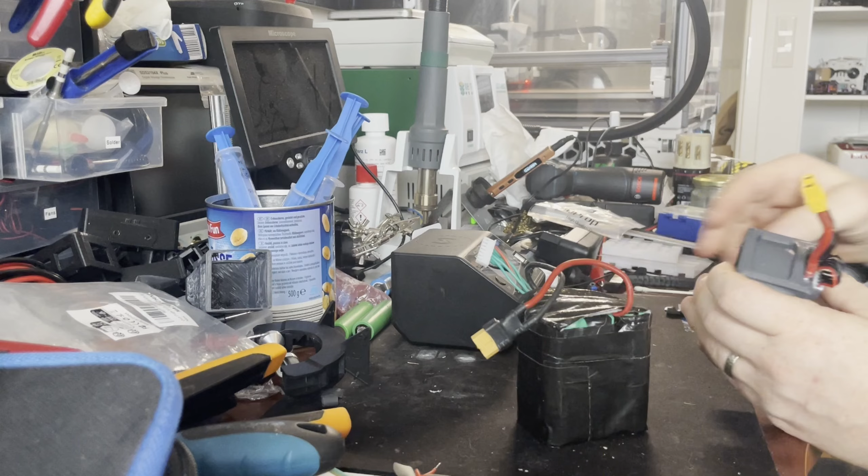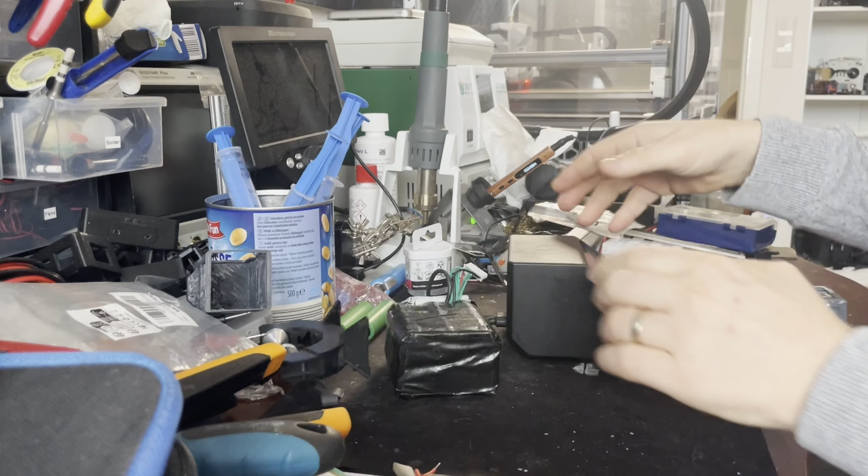Alright friends, I want to talk about power for charging your stuff on the field. Everyone has some LiPo chargers that you can use on the run, no problem. You can plug in your stuff here and get it connected. And what do you do? You have some big 2170 pack or something, you plug it into your charger. Ta-da. And then you can go and charge your batteries on the go.

But you have to take care of these batteries, and you have these balancer ports, and you have to charge them the same way like you have to charge your normal batteries. And that sucks, it's not great. So what do you do? You get a power bank. So you have a power bank here. It's a USB power bank, and you can go.

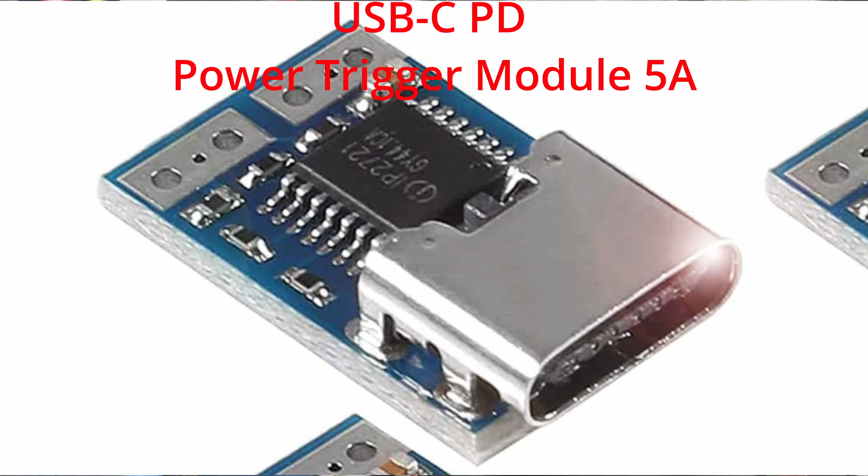What we can do actually is we can get a USB cable, USB-C, plug it into your power bank, and then take your power bank here. Then you get something like this. This is a little converter, and I can show you in detail in a minute. And you just plug it into your USB.

So okay, and then you go and plug in your stuff, and normally, maybe other way around. Direction doesn't matter with USB-C. Then you can go, and it's 20 volts, 0 amps right now because I'm not charging anything. Then you can plug in your battery, and then you can charge your battery with a power bank.

That's fine, but something like this will only work for, it's 70 watt hours or something. So it's 20,000 milliamps 1S. That's fine, but it's not really that great. So what can we do? Charge these things all the time, and that's really not great. I don't like it because I don't want to fiddle with all this balancer port stuff. And because of that,

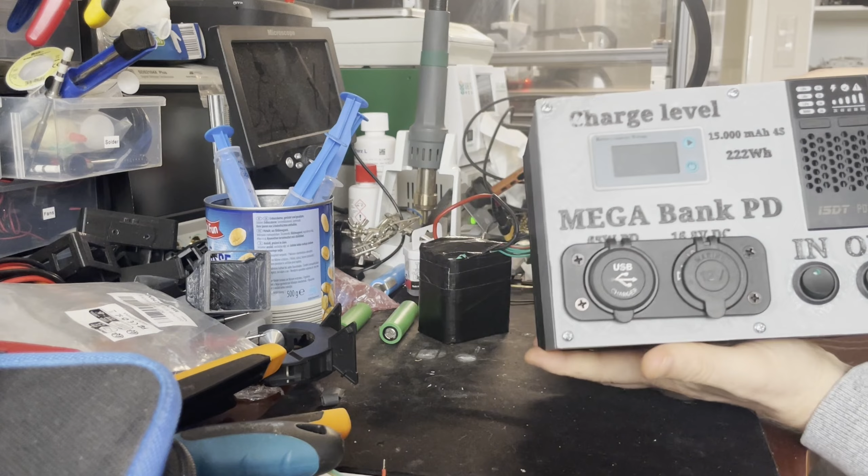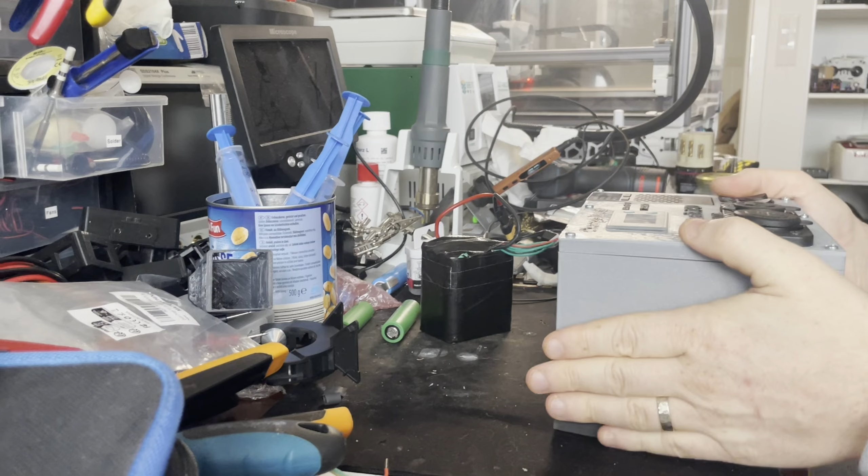I built a mega bank here. This is a box that I have printed in ABS, and it has multiple features. One feature is what I was complaining about a second ago, how to charge your power bank. A normal power bank just plugs into USB-C, and you have a USB-C charger anywhere, and then you can charge your normal power bank.

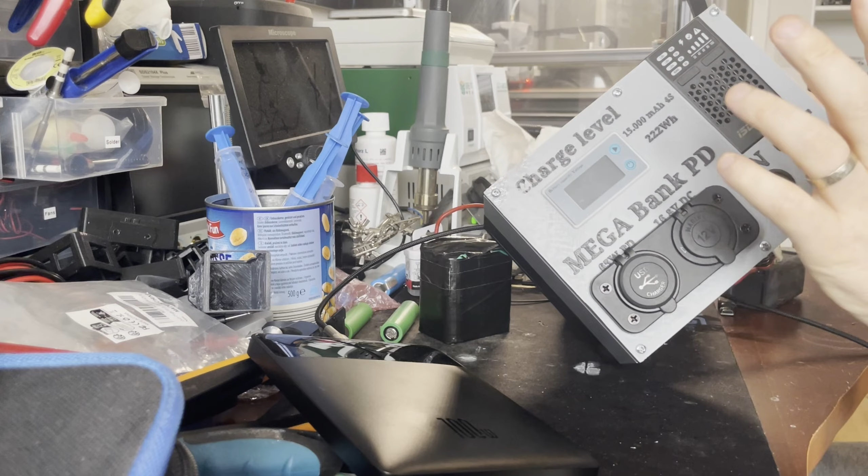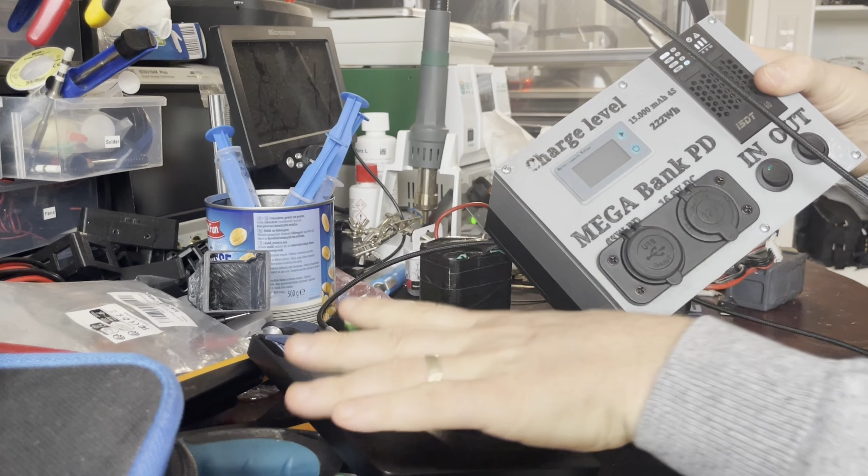And I wanted to have the same experience, and because of that I bought this ISDT PD60, and this one is a 4S LiPo charger that can also charge lithium ion. And this thing has a USB-C interface for input. So you just plug in your normal charger, also your desktop charger or your wall plug or something like this, and then you can charge. So now we see 3 amps, that is 60 watts, and this is PD60, you get the point.

So this thing can charge with 60 watts, but it doesn't matter if it charges in 1 hour or in 2 hours or in 4 hours. I don't care. I just plug it in the night before I go anywhere, and then this thing charges the battery inside. In a second I will show you how the inside looks. But before I do that, I want to show you how the thing can do anything at all.

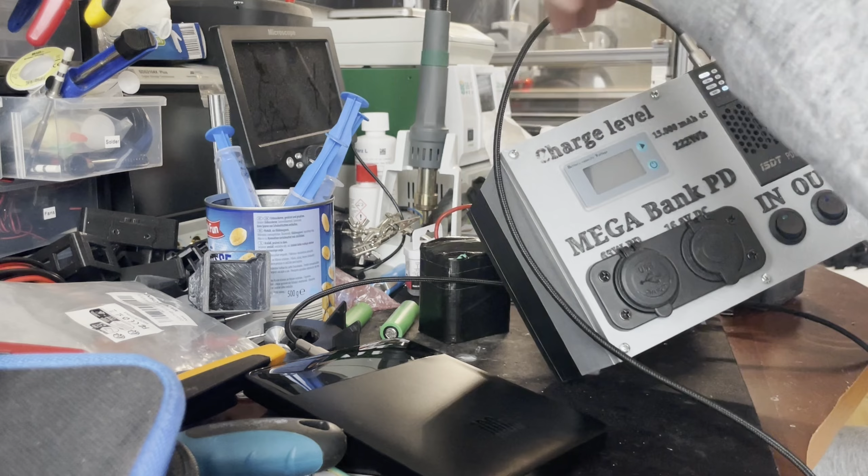Right now, this charger is the only thing connected to the battery, and the output of this battery is not connected to anything. So output and input are the same, but it's not discharging itself just because you let it stay somewhere. And we have a little display here, and we can activate it with this button here, and you see it's 94%, 16.4 volts, and it has an included thermometer that measures the temperature of the cells itself.

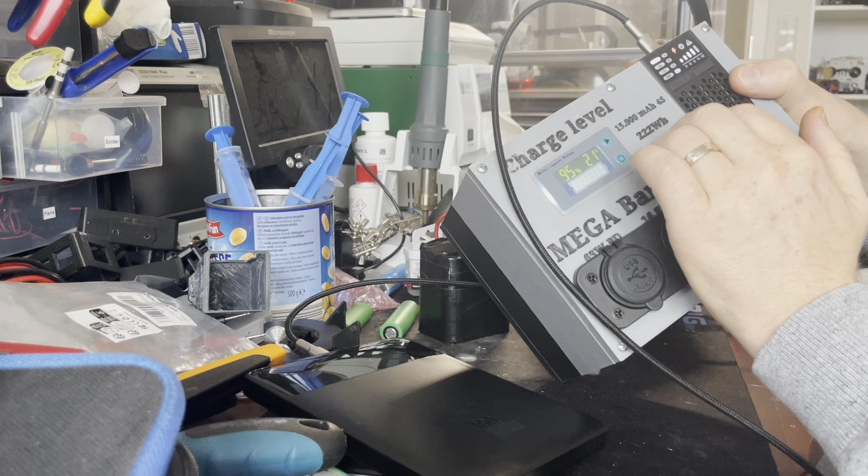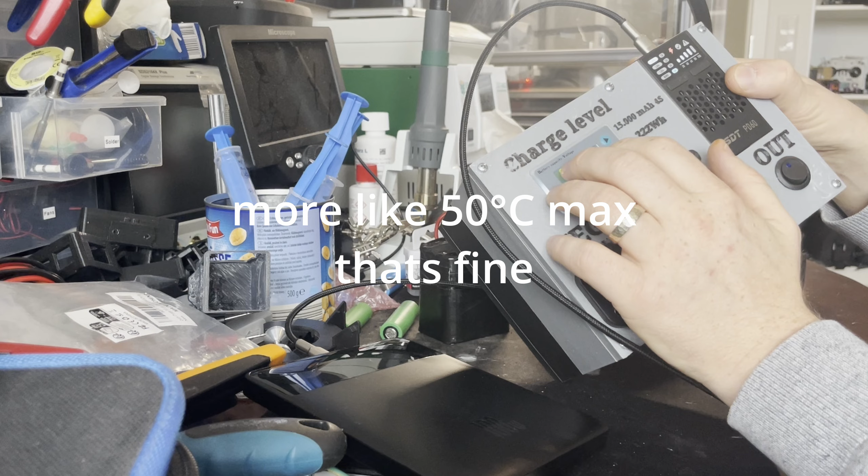I have superglued it to this battery, so it knows how hot it gets, and it gets really hot. If you completely discharge and recharge it, it gets up to 50 degrees Celsius. That's quite warm, but it's okay for lithium-ion cells, so it's not really a problem. And if we stop charging now, the voltage gets down to the level that the batteries actually have right now, that's 16.3. It tells me 91%, but that's just some guesswork between 10 volts and 16 volts.

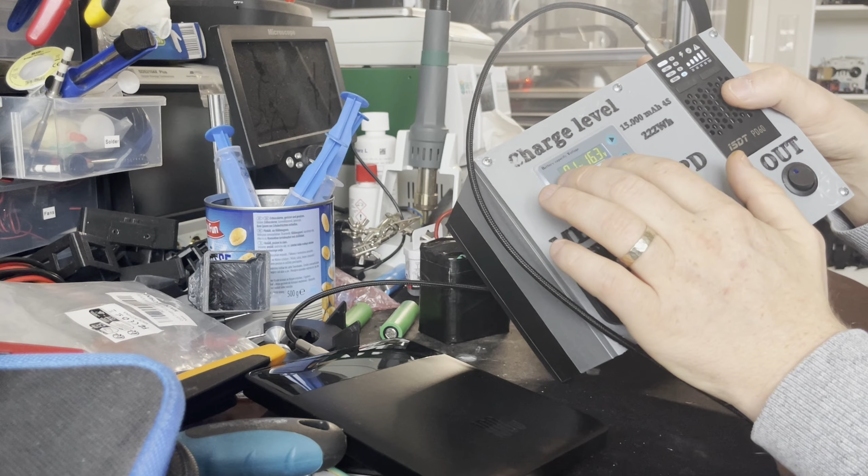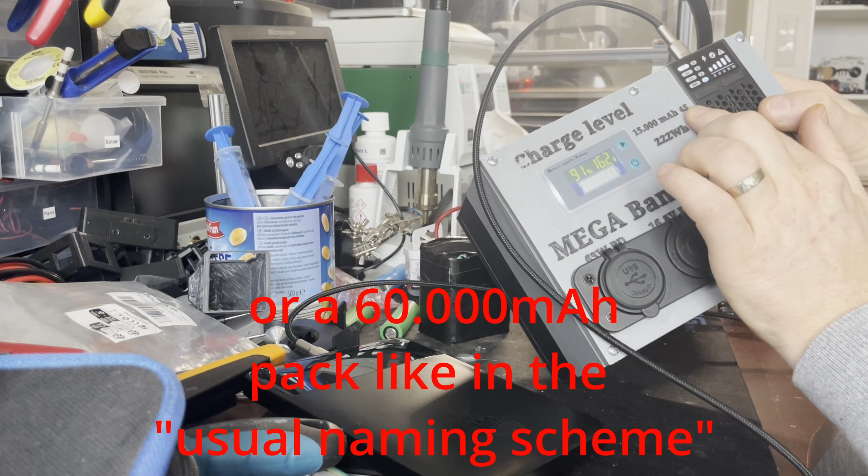It's a 4S3P pack in there with 2170s, each of them has 5000 milliamps. So we get a 15,000 milliamp 4S battery that equals 222 watt hours. So it's 0.2 kilowatt hours, in this box here, that weighs about 1.5 kilo completely. And to use it, you have two possibilities. One is a normal DC plug here.

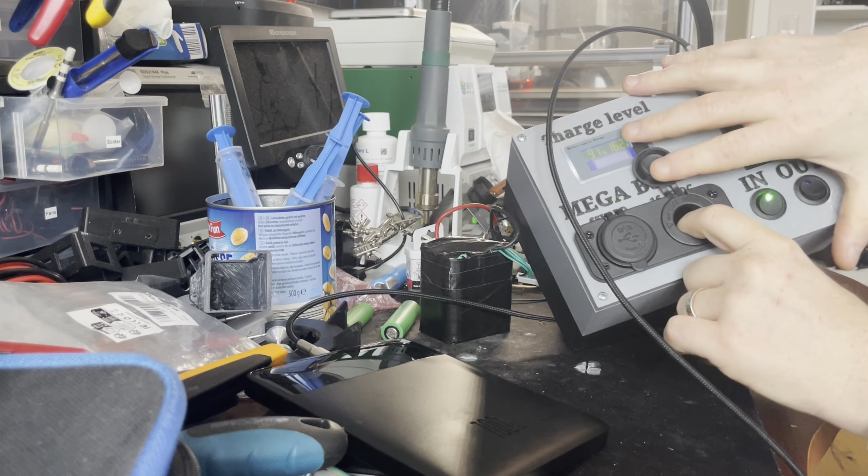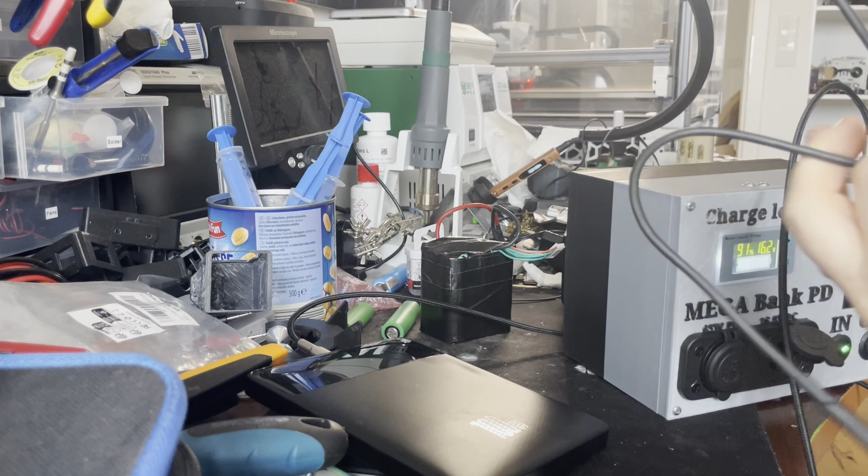You can plug in anything that you can plug into your car. And actually, I have something. Yeah, I have this thing from Dell. It's a car notebook charger with a USB-C output. So I can go and plug this one in here, attach a notebook, and then you can see that this light is going on. And then you can charge your mobile phone or your notebook or something like that with this one.

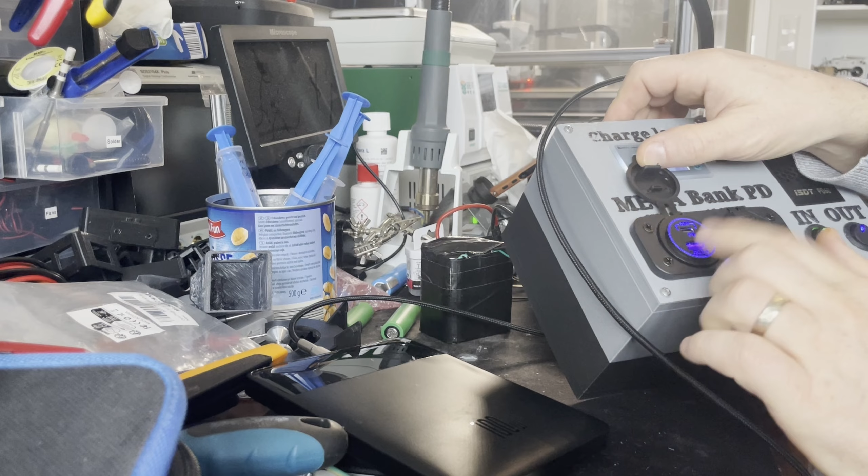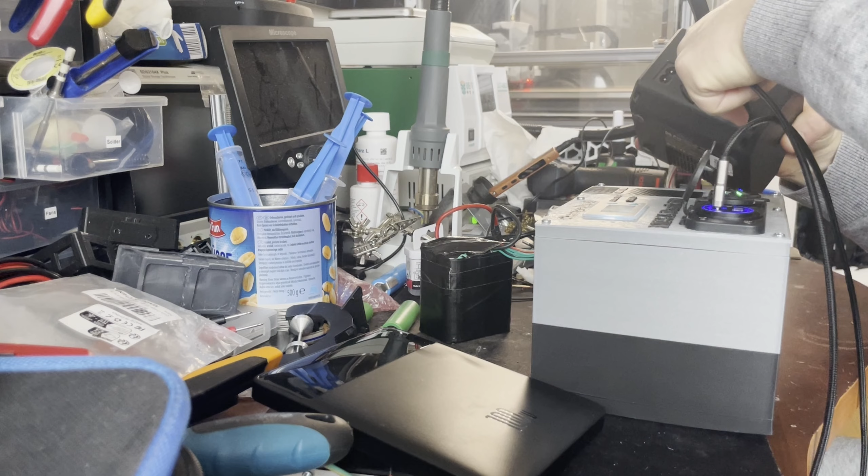But that's not the primary use case for this one. What's more interesting for me is this USB PD output, and you can enable this with this little button here. And then we go and use this USB-C cable here I just used to charge the thing, and I can plug in something here. My adapter on the other side, and you know that it works without complaining.

Yeah, and this one powers on, and then can charge batteries with the USB output to normal DC here and use it. Or you can go and charge your notebook with this USB-C output. It works. And you have a normal USB QC 3.0 with 18 watts. You can use it to charge a normal phone, or you can go and charge your power bank with your power bank.

Yeah, it's working. It doesn't care which way it goes in or out, but this won't be the primary use case, to charge a power bank with your power bank. But you can charge a mobile phone or anything with USB-C. What I wanted to add is more and more things you need on the field to fly have USB-C only to charge them.

So, for example, the DJI Avata has these smart batteries here that don't have a balancer plug or something like that. They only have the smart interface, and you have an included charger, and this included charger only accepts USB-C, and that's fine if you're at home. But if you're on the field and you only have 1 or 2 batteries and they are empty, you're pretty much stuck if you don't have a big power bank.

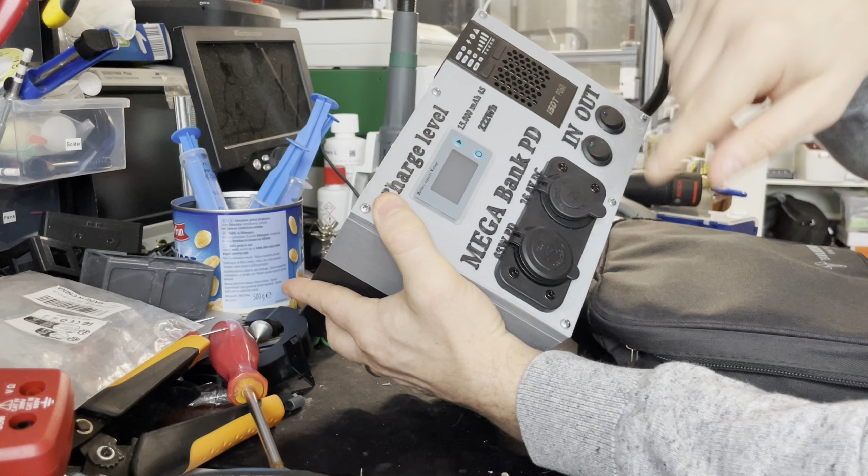What I also wanted to tell you is this 12 volt port here is a straight output from the battery with a fuse to this port, and you can easily take a 12 volt car charger plug and solder an XT60 on it, and then you can go directly from here to the input of your charger, and you're fine. And you can use 15 amps or 20 amps, whatever your cables can handle, to charge your batteries. So you can easily use 300 watt output from here to your charger.

It's no problem, but you need fitting cables and a fitting fuse on both sides inside this power bank. And usually those car adapter cables have separate fuses inside. And if all these fuses match what you want to do, you can go further than just 100 watts or 200 watts. Maybe they are rated for 100 watts, but it's 16 volts, not 12, so it's a little bit more. I guess 120 watts would be perfectly safe, and usually if you don't charge 4 batteries at once, 100 watts is fine. And yeah, that's what I wanted to add here.

And then I will show you how the thing looks from the inside. Yes. So. All right. So. Go there.

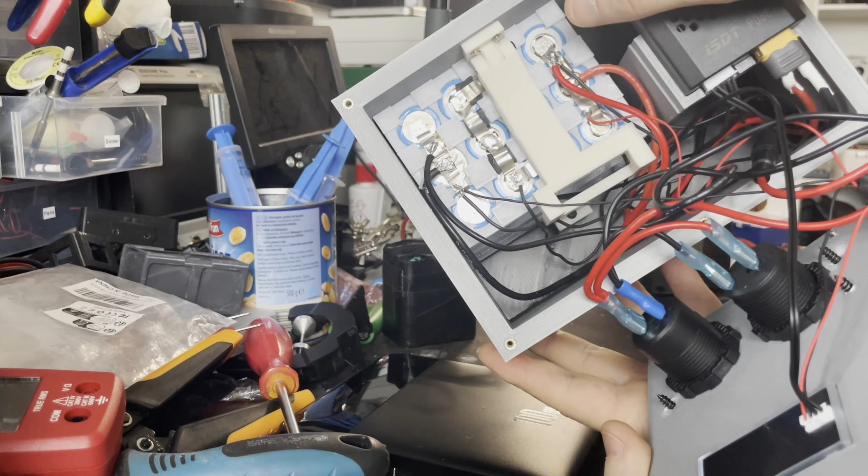Inside you have this 21700 pack with 12 batteries. It's 4S3P. You have 3P here, 3P there, there and there, and 12 volts come out here at the top, and on the other side goes round, and the negative side goes

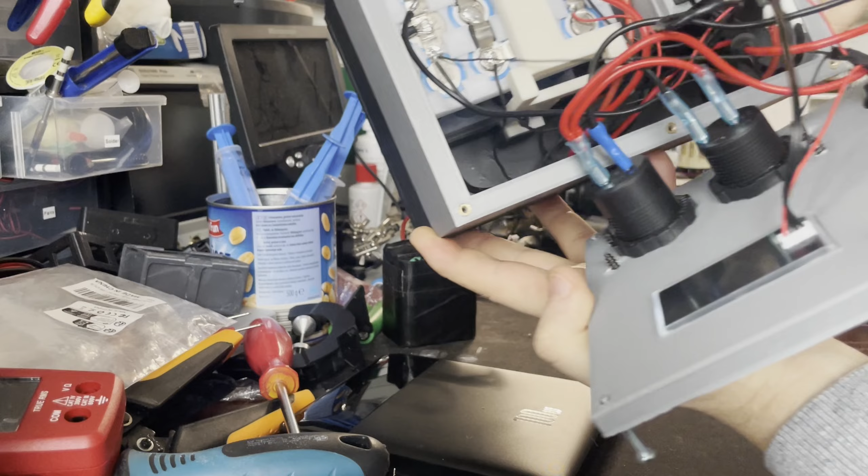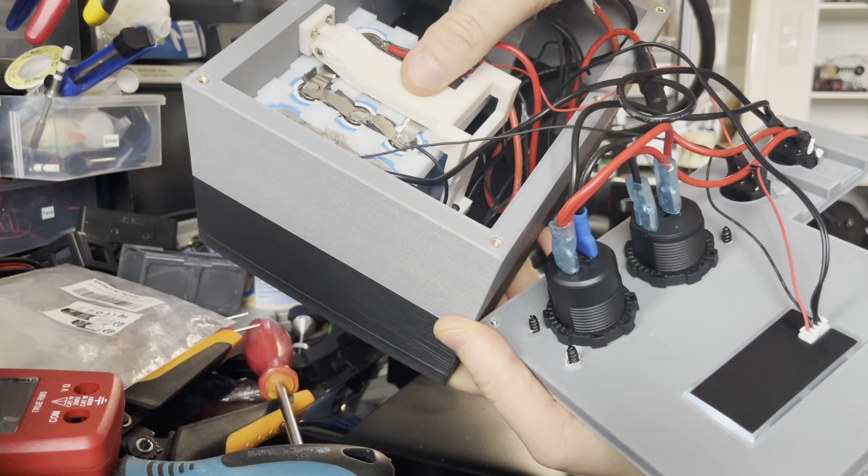out here, and all of these plugs are connected to these cables here and to this display and the switches and so on. Yeah, and of course they're also connected to the charger here, and I have made this box to accommodate all the stuff, and I printed this little bar here to fix this, hold it in place so it doesn't wander around or do something it shouldn't do.

Yeah, and if you make such a pack, you should know what you're doing. It can be dangerous to handle those batteries, and for example, on the positive sides, I have everywhere installed this isolation under these nickel strips to stop shortcuts from happening from the positive to the negative sides. It's pretty important. If something touches here, it is a bad day for you and everyone around. So if you make something like this, you should know what you're doing.

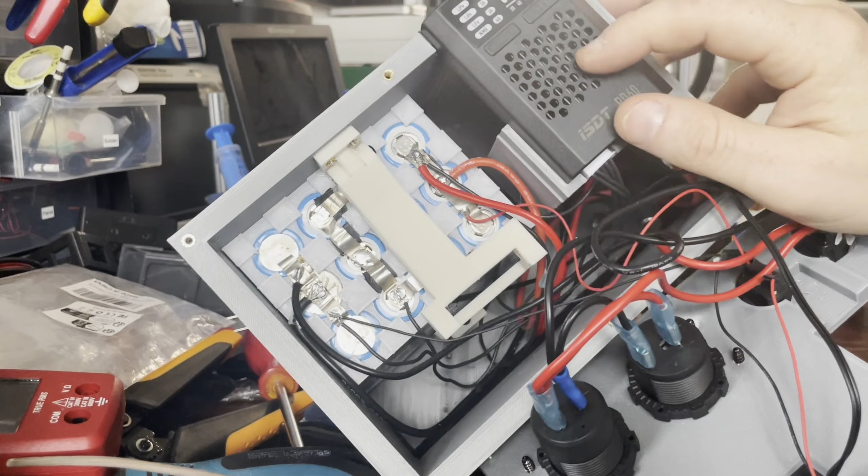But if you make a field pack, it's the same story. It's just a hassle to charge the things. So I wanted to have a USB PD input, and this is this charger here, and this charger is just 17 bucks on Amazon. You can get it pretty cheap, and you can plug it into here and you're fine. And yeah, I can show you the design of this box here. I have the STL files. I can publish them to Printables. It's no problem.

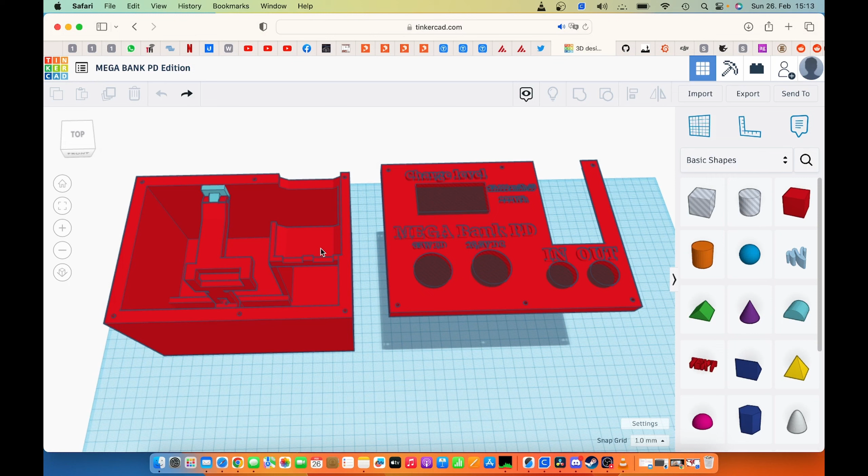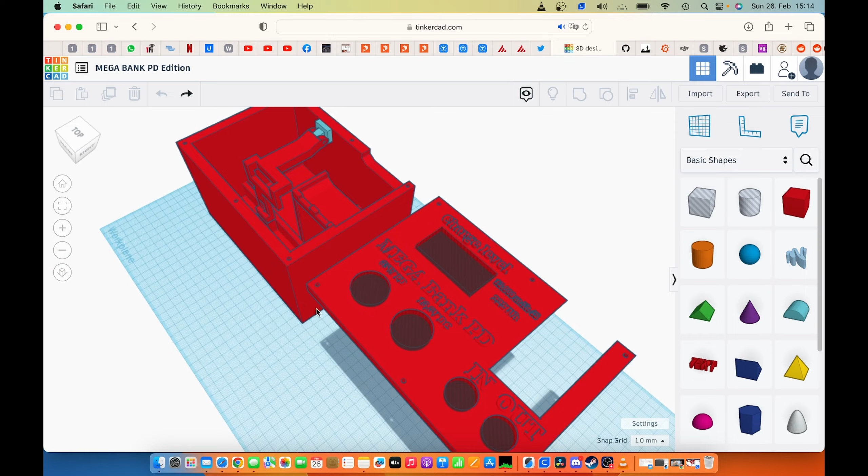Alright, I told you I wanted to show you how I made this power bank here, and it's quite easy. It's just a box, and I measured the dimensions of this charger here and made some negative cutouts on both sides, on the top of this box and on the bottom side, and I made this support here where you can put your charger on, and it lies on this side here, and I put some rubber here to fix this from sliding out.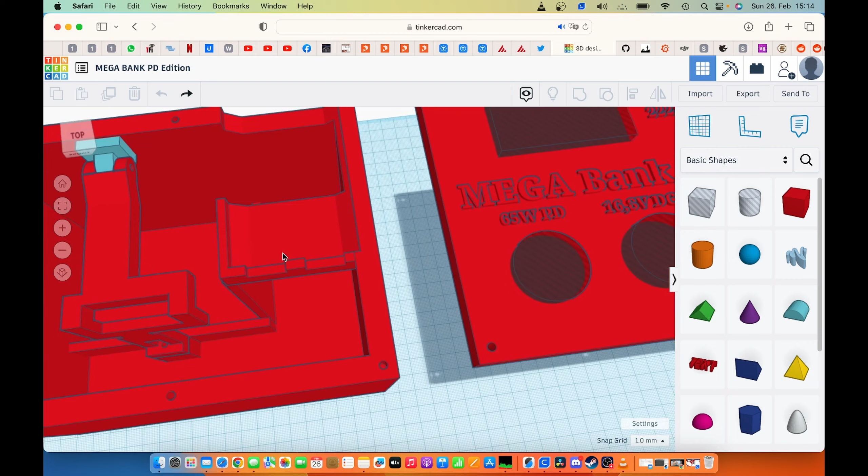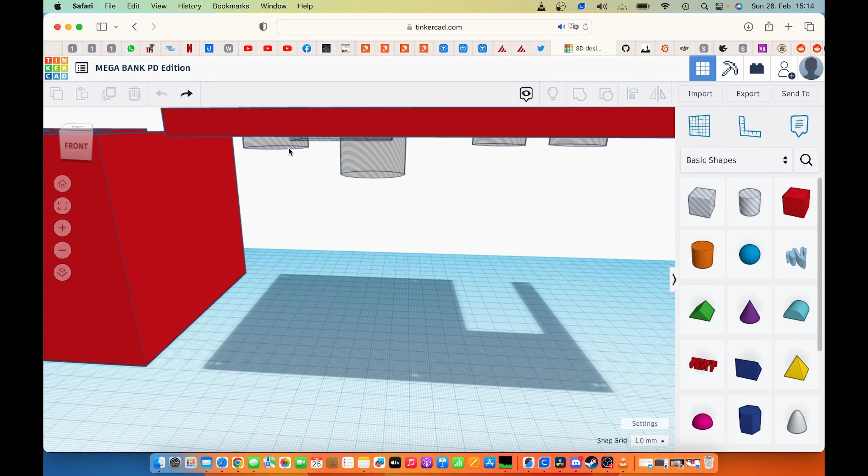Here are the cutouts for the balancer port and for the DC XT60 port, and yeah, it's quite nice, it works. And we have some space to spare for something else, or you can put in bigger batteries here if you just move these walls to the right or move these lips here. You actually can go a little bit more to the front, but you have to make sure that the plugs for the 12 volt and the USB work. So you need to extend in your head the size of these cutouts here to see if the box can fit or not.

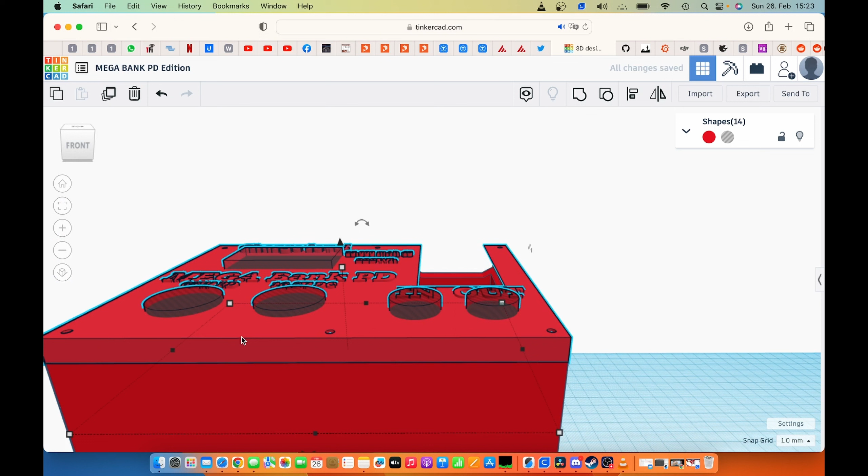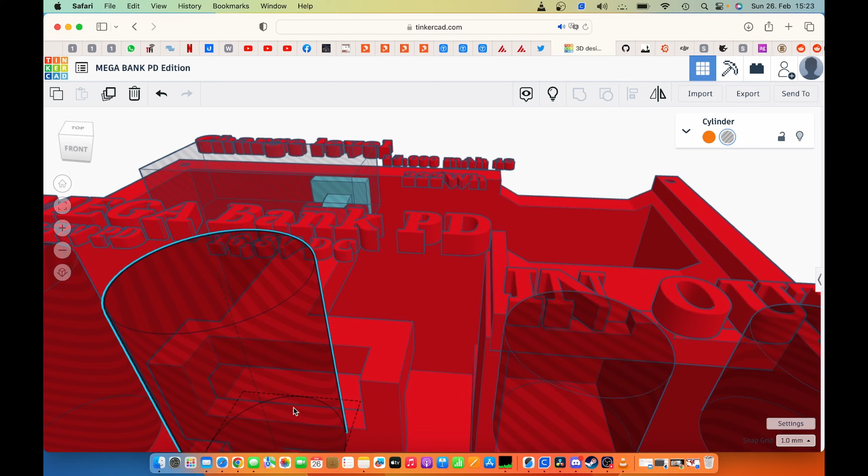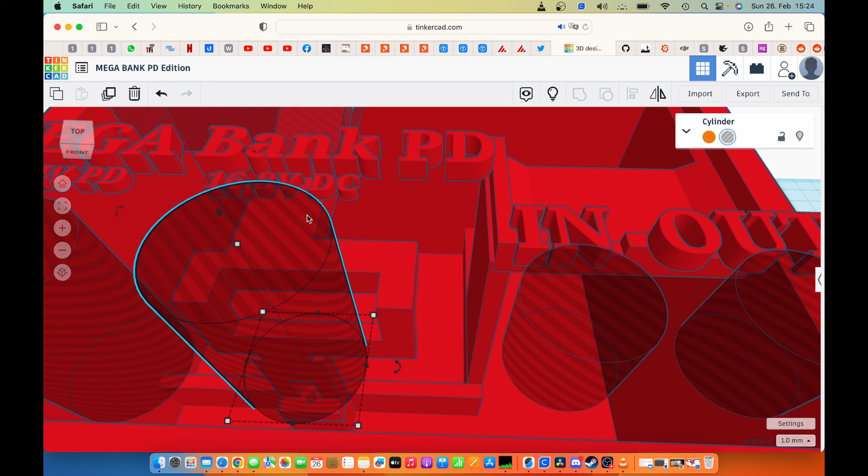Yeah, you can just take this one and move it so far to the left, so it matches now. And if we just make this top part here invisible, then you can see why I made this cutout here to the bar. It's made to make space for this mounting there on the bottom, and yeah, that's how it's done. And if you want to make yours, maybe you just put it a little bit more to the right or a little bit more to the front, so it doesn't interfere there. But I already printed the box and the top, and then I realized that this bar is not working, so I made it. This is strange, but it works.

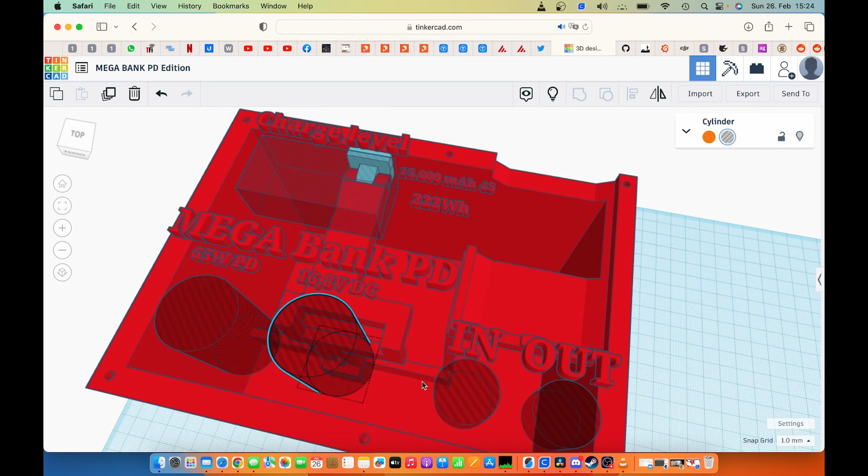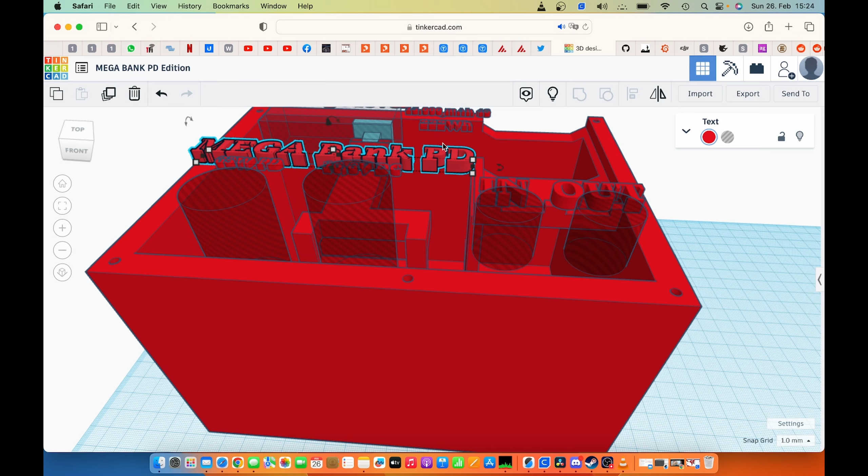And version 2 might have this part a little bit more to the front or more to the right, so you don't need this strange looking stuff like here. And the letters here are just normal text elements that I put into the top of this box, and I made the printing pause at the exact top of the box, and then I changed filament to black, and so you have different colors, or if you have a printer that can do different colors, it would be easier.

And one little safety feature is that this output here is fused, and you can change the fuse. It's 15 amps right now, but I guess the cables here can easily handle 20 amps, so maybe I'll just exchange the fuse with something bigger. But if you have 65 watts on this and 18 watts on this USB A, and you have something about 60 watts with this DC plug here, you just barely hit this 15 amps, and so I guess it should be fine.

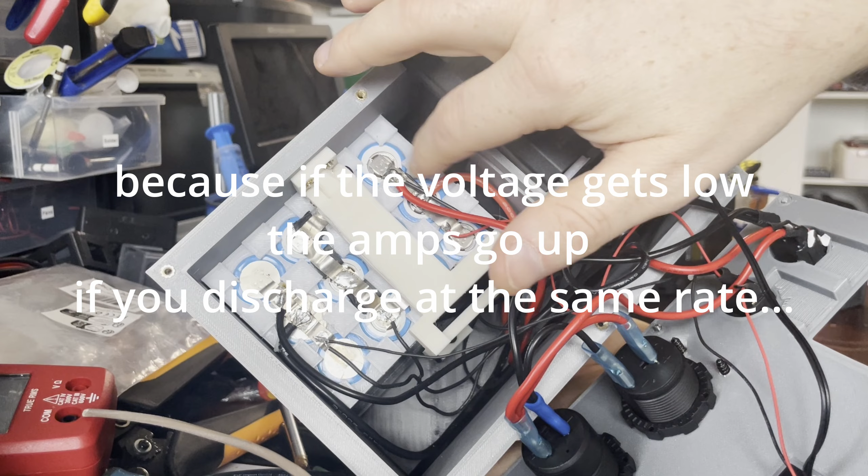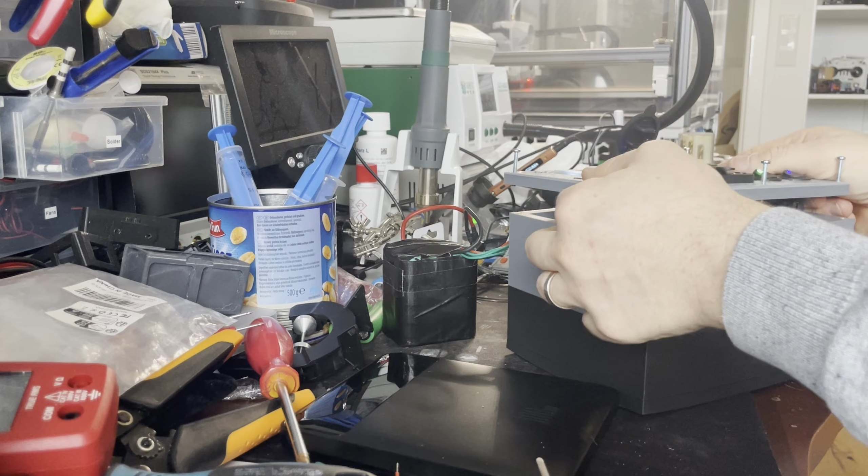It should only be a problem if you get a really low battery here, and I've discharged it to about 10 volts, and then it's quite empty for lithium ion cells. It's 2.5 volts per cell. That's the point where you should think about charging it again. But it works, and it's quite nice, and I like it. And yeah, so you have a power bank you can use for more or less anything. And yeah, that's all I have to say about this one right now.